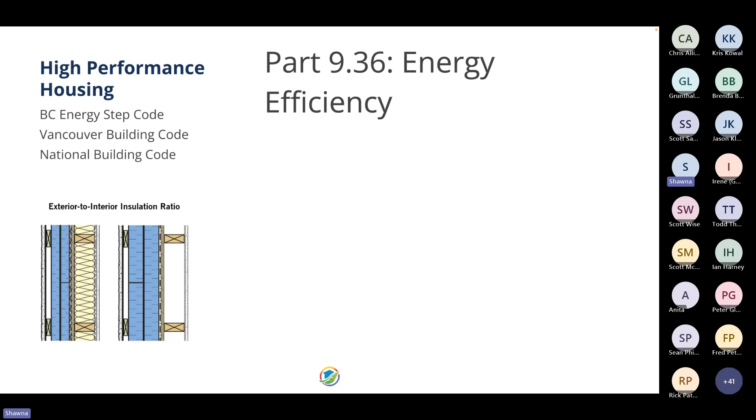Coming up in the 2025 code are retrofits. This means Part 10, alterations to existing buildings, is focusing on energy conservation for retrofits. So this is huge for all of those builders or contractors that you have not seen focus on high performance. They're now going to have to actually work within that realm, and it's going to be new to them. So why do we care so much? How does it affect you?

Because we're moving into places where building science is the key. Part 9.36, everything to do with energy efficiency and energy conservation, is based in building science. Building science looks at the house as a system, how all of the parts of the house or the building interact with each other: the envelope, the occupants, the outside environment, mechanicals. It's all connected. It's all dynamic because we have moisture changing, we have temperature changes, we have wind. We want to make sure that we can control all of those things so that the house is comfortable and reduces energy use for the occupants.

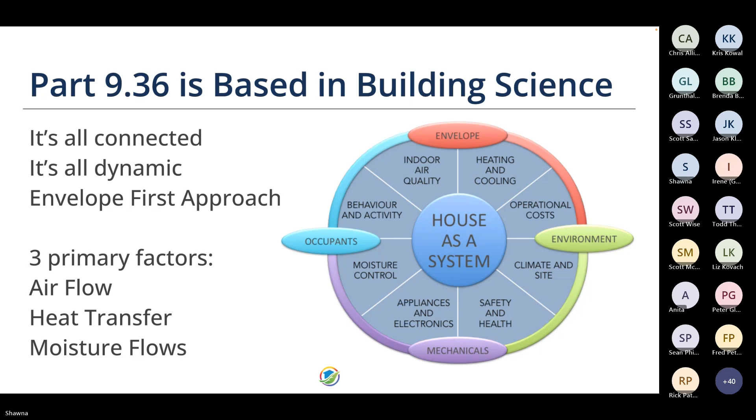And then bonus points, when we reduce energy, we also typically reduce carbon loading, so we're doing something for the environment as well. So the key primary factors for building science are based on controlling airflows, heat transfer, and moisture flows. When you get into these high performance buildings, the key to them, because it's the most complex piece, is a high performance wall. Now, everything else has requirements within the building code for insulation levels, for air tightness, for the different control layers, but the walls are the places where there's the most variation.

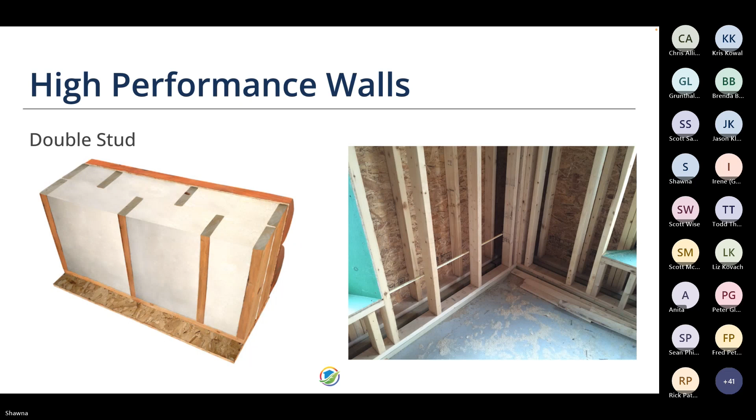There's a lot of variations in this one in terms of how builders like to do the assembly. Mainly, they like to do this one because there's no special training and no special materials. You don't have to do a lot more than put up two walls, one inside the other. So crews can stand them up pretty quickly.

The other wall, and you'll see this a lot as well, is a split insulation wall where you have rigid or semi-rigid insulation on the exterior of the sheathing. And you have typically a very inexpensive batt insulation to the interior in the stud cavity. And these vary widely. You can have rock wool, fiberglass, blown cellulose on the interior.

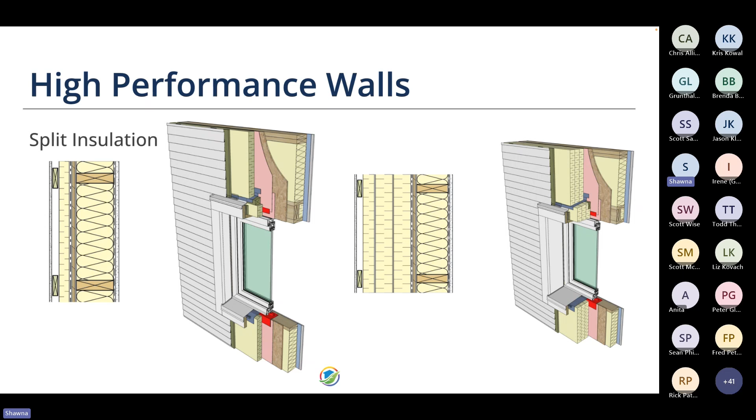You could have semi-rigid mineral wool on the exterior. You could have a type 1, type 2, or type 4 insulation, polyisocyanurate, or an insulated sheathing product. Wide range here too.

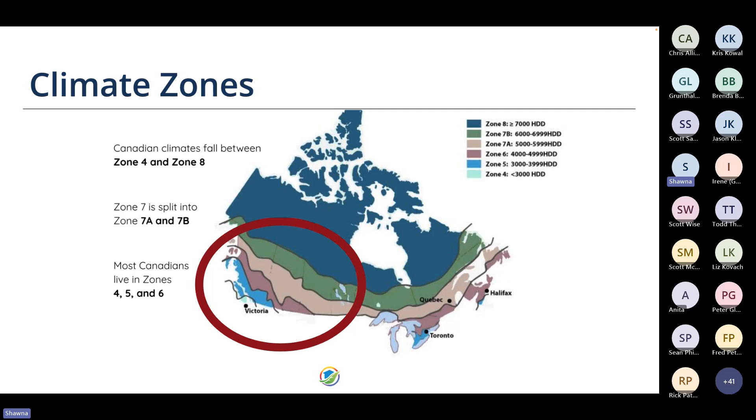What we also need to know, once you get past all the different pieces and bits of the high performance walls, is what suits which climate zone. So most Canadians live in zones 4, 5, and 6. When you're in Western Canada, if you're in BC, you could be in the range of between 4 and 8.

But once you move past that first border, you're moving into colder mid-continent climate zones. So by the time you hit Saskatchewan and Manitoba, now you're actually in zone 7A, 7B, and 8. And those are very different approaches because of the extreme temperatures.

Now, we can go back to most of the population lives in 4, 5, and 6, and the bottom part of 7A. There's a broad swath of housing that we can work with some really solid building science that has been brought into place right across the country. The top part of 7A, and then 7B, we really need to focus on more detailing and take a different approach to the products that we're using for insulation.

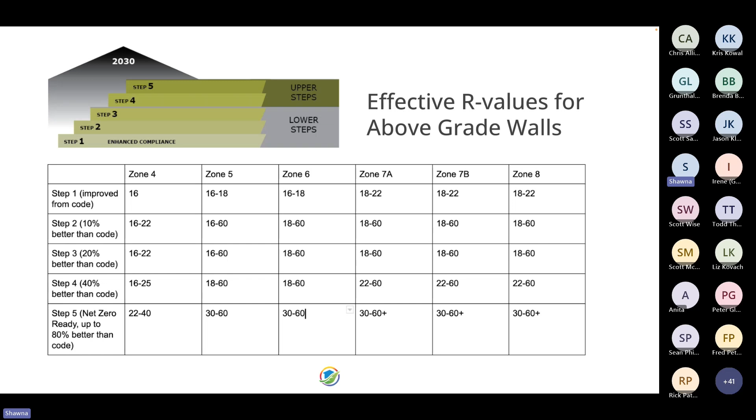But you can see that there's quite a range of effective R values for above grade walls as you move through not only the climate zones, but as you move from step 1, which is slightly improved from the 2010 code, through step 2, 3, 4, and 5. So how you deal with these ranges of climate zone and which part of the step code or the tiered code you're working with is key.

There we go. So on top of effective R value, which is a weighted calculation that takes into consideration the fact that you have differing insulation or thermal resistance between areas of a wall. For example, the studs are wood. Wood has R1 per inch. So if you've got a 2x6, you've got R5.5 or so.

And in that cavity, you could have up to R24 batt insulation. If you went with something else, like a closed cell foam, you'd have more insulation there. And so effective R value basically says, here's the percentage of stud, and here's the percentage of stud cavity, and gives you a weighted solution. So that's what effective R value is.

On top of that, you also need to know what the inboard and outboard ratio is for the cavity fill and the outboard insulation. I'll get into why in a second. And then you also need to know about the permeability of the whole assembly. So those are three things that are all in the building code,

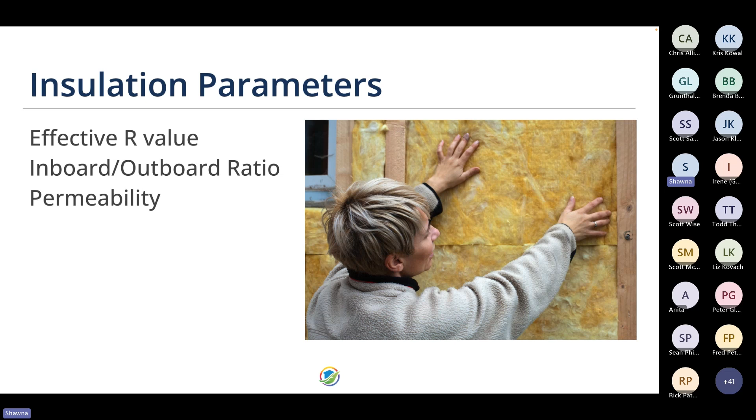So our biggest threat, and it's probably no surprise to anybody who sells lumber, is that mold loves wood. Moisture is the source of mold, and we get occupant health issues on top of rot and structural issues when we have moisture and mold problems in a house. So the ideal conditions for mold to grow are very much like an interior of a house: anywhere between 18 to 24 degrees, moisture content in the wood at 20, and relative humidity in the house of 50, 70 being when mold really starts to generate. So those are not uncommon conditions for the interior of a house.

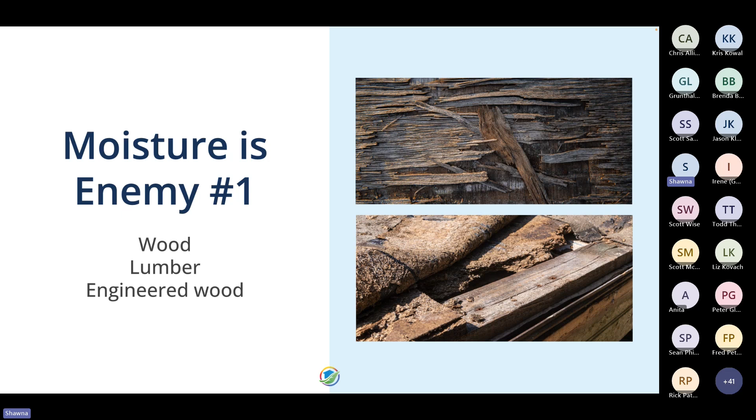And we know that moisture is enemy number one for wood. Solid wood and lumber take a long time to decay and perish. But the more you get into engineered wood products, the faster they delaminate and decay when exposed to moisture and temperature problems or extremes. And then we have cellulose-based products. So the whole house is basically built out of wood and cellulose. And when we have paper-faced drywall, we end up with mold when we have those high humidity levels. And this is often the time where we go, there's a big problem here, and all we're seeing is the superficial piece, but there could be rot and structural issues behind.

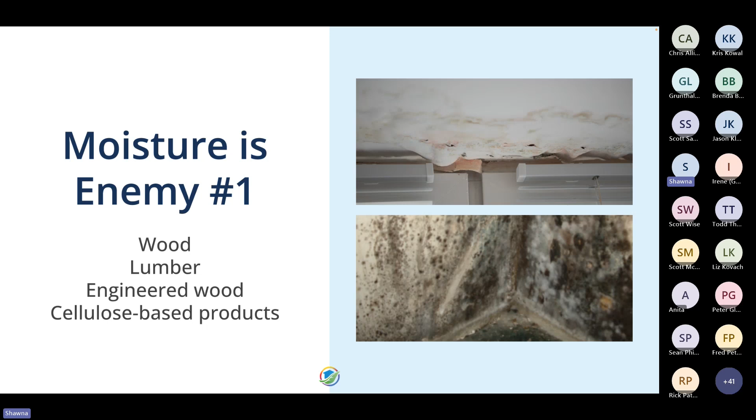So we want to make sure that whatever we're doing in a new building that we're taking to high performance, but especially in an older existing building that we're going to move to a deep energy retrofit, that we are not creating more problems in the wall system than already exist or could exist in the case of a new building.

So that's all about control layers. And control layers are the outcome of building science. The role they play is to counteract air, moisture, and heat flows. So we have an air barrier, we have a vapor barrier or vapor diffusion retarder. We need to create a thermal envelope. So we need to have something that's going to give us the thermal resistance of the insulation. And then we also need weather protection. So when we're talking about walls, we're talking about a whole system. And this also is part and parcel of foundation and ceiling/roof components, but the whole house has to be dealt with.

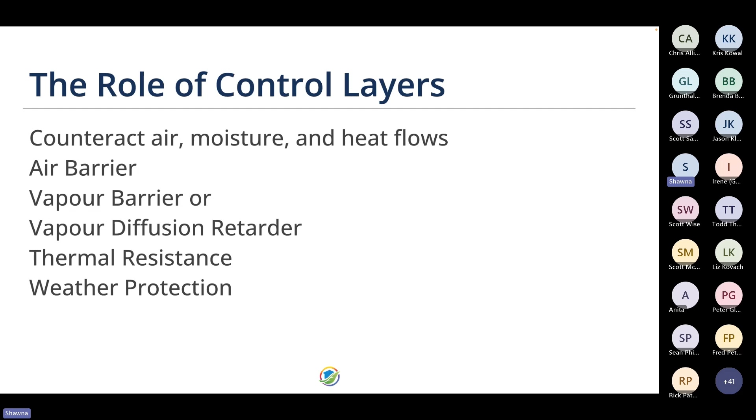But I'm focusing on walls right now because they are the biggest puzzle piece, and they are the biggest puzzle piece because that's where occupants are most affected by the assembly. So it's either they're comfortable because the ambient temperature of the inside of the wall is closer to their temperature, windows are high performance, so they're not losing as much heat to the window from their own bodies, and then also, of course, the energy efficiency piece of it. So we need to be able to create these assemblies looking at what the thermal gradient and wetting potential of the wall is.

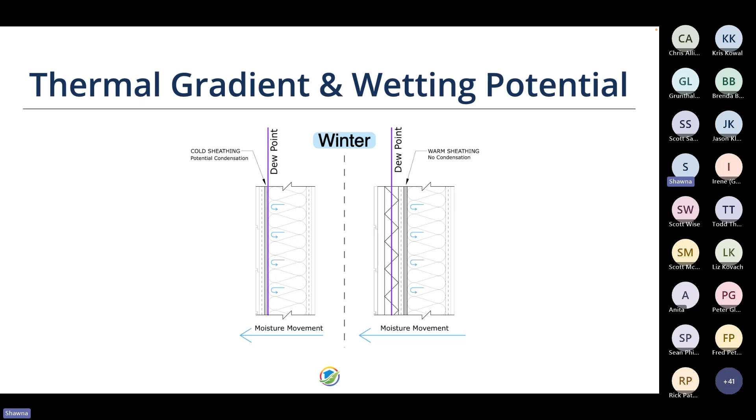We have this thing called the dew point, which is where the temperature of the air that is in the wall starts to get lower as it reaches the outside temperature. And we want to make sure that that dew point is not on the back of a cold sheathing, because it's going to condense out and cause moisture to be trapped inside the wall cavity. We want it to be outside, either on the outside face of the sheathing or on the outside face of that split insulation, depending on the wall system that I showed you earlier.

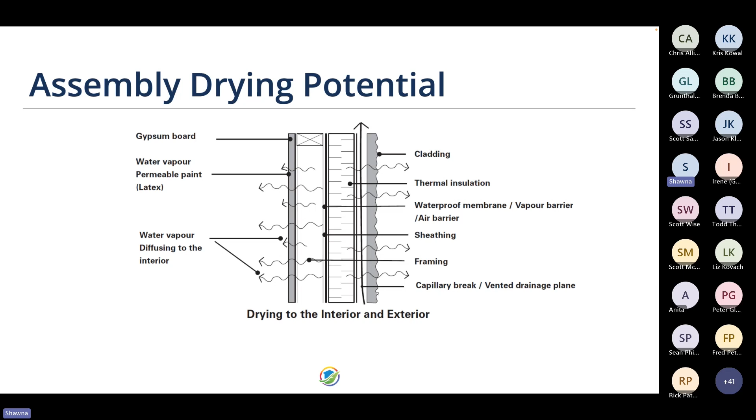So the drying potential has to be baked into the assembly, so it can dry to the interior or the exterior or both. And again, that's going to depend on where you are and what the builder has chosen for their assemblies, or what the renovator is putting to the exterior, or whatever they're doing to the building envelope.

So we have an air barrier. Is it interior or exterior? The vapor diffusion retarder, where does it go? What does it solve? Insulation. What's your best choice for above grade, below grade, the interior, the exterior? Do you need a permeable material? Is impermeable the way to go? So there's a lot of decisions to be made.

And if your client is coming to you and has asked for a material, and you don't have that in stock, or it's not something you carry, you're going to have to be able to provide them with a reasonable substitute that is going to match the characteristics of the product that they have spec'd. So material choices, to wrap up, are key to the performance success as well as code compliance.

So performance success means that we can keep the house comfortable, but we're also not baking in unintended consequences of trapping moisture or creating other issues in the house that are going to cause some comfort problems.

So as technical sales folks, who do you serve? You serve the builders and the renovators, but more importantly, who's coming into the store to talk to you about the materials? Is it the builder or the renovator, or is it their contractors? And out of that whole chain of people who are involved in the process of building, who's the person who understands the code and the building science? And who are they relying on for the materials choices and substitutions? It's going to have to be partially up to you folks who are doing the selling.